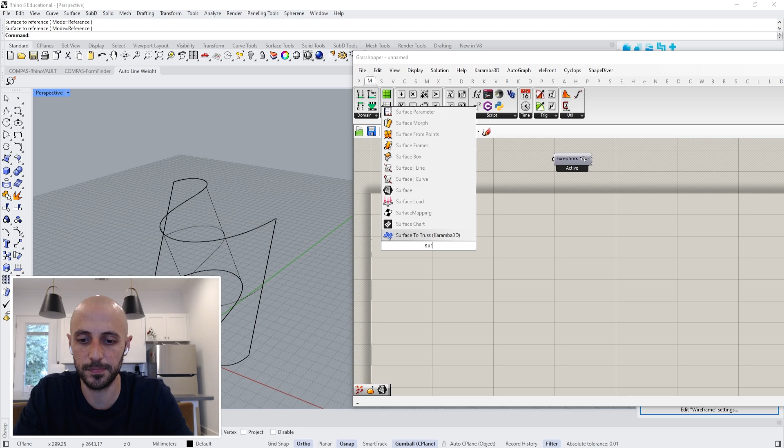Now you can keep your recipe scripts and your files clean and tidy. I've already created this surface here, and let's put this in. So imagine you're working with this surface, but you are doing a couple of different things. So for instance, I contour this surface from this corner to this corner.

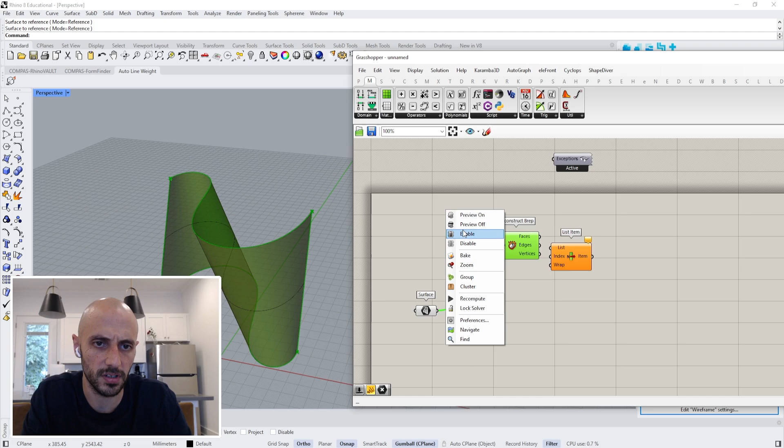Let's start with that. I deconstruct this B-rep, and then I just get the points of it, grab a list item. Maybe I can preview this off for a second. This is my top right corner. This is my maybe 0, 2, 3. I can connect this here. So I get this one here, connect this one here.

So the first thing that I can do is, you see it started to go off. So what I can do, I can create a point, because these are the point outputs. Connect this one here, copy this and paste it, connect this one here, and then I will have the same thing. Okay, since these inputs are the same coming from the vertices, I'll be doing the same thing, but now you see it's all clean and tidy.

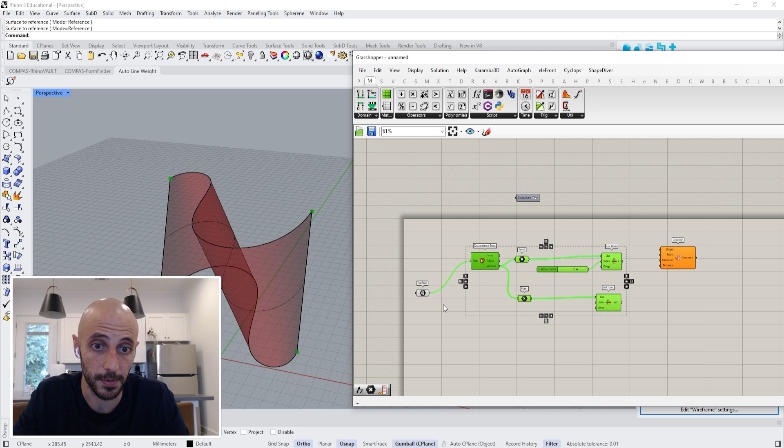So if I want to contour this again, I'll be contouring this shape, right? My surface shape. How will I be doing that? I probably want to do this, right? But when I do this, you see there is a diagonal coming in, which may be a big problem, especially when you're dealing with a lot of stuff coming from the same input.

Therefore, what we'll be doing here, oops, I can delete this one. What we can do here is to create another surface component, connect this one here and this one here. You see, I have the same surface component, but even if I have another surface component, I can contour the surface, connect this one here, copy this and paste, connect this one here, and take this here.

Second thing, it's asking which point I want to start contouring. This point is fine. Direction, it's asking me for a direction. I can create a vector 2 points, starting point and the end point as a direction. Don't need the length of it. And for the distance, what I can do is to have 125. So if I put this, what I started to see, I have these diagonals as my contours.

Okay, so why is this important? Because now we know that our contouring surface is different than my deconstruction. So what I can do, I can select these two, make them a group, right click, blob outline, right click again, color, and change the color to red. Okay, and this is my starting input, so I can also group this one. This time maybe I can keep it as, I don't know, purple and rectangular.

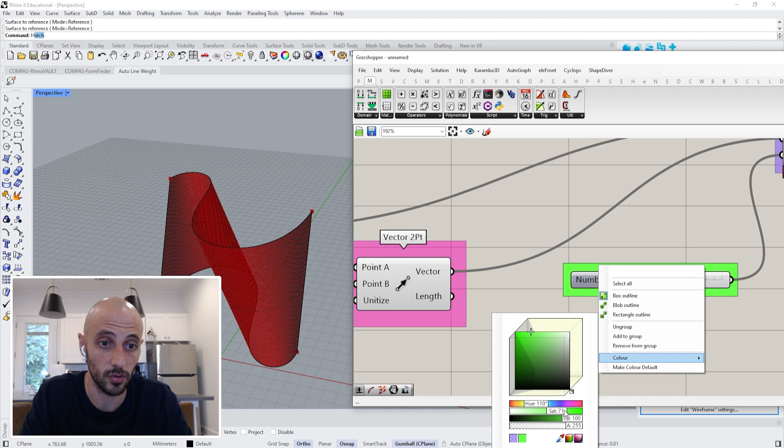But at the same time, I can recolor them based on your color of choice. And on top of these, since we have the names, we can add some remembering points as well. Do we have any other purpose? No, so we can keep it as it is. I also always like to put some colors to the sliders where I immediately see where I have the complete control. Okay, so you see how easy it looks now.

The next thing, let's say, that I want to do here is to find the normal of some small surfaces on top of it. For now, I can preview this all off, all right? And let's say I want to use isotrim, connect this surface, go to domain, divide domain. This is my division domain. I can pull out like 20 and 30 as my inputs, connect this in here as well.

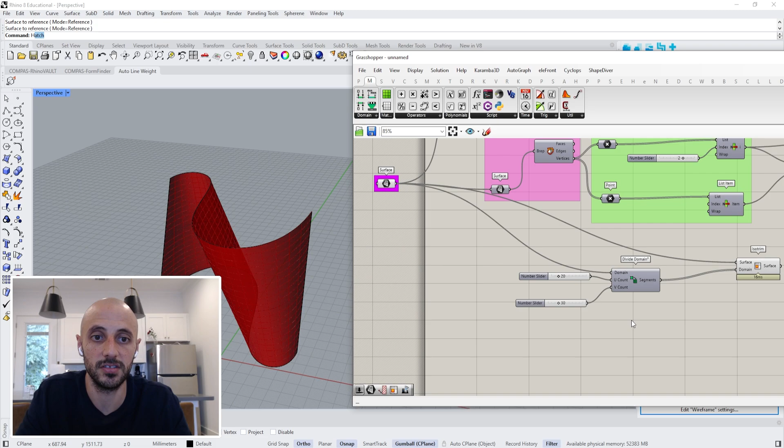But immediately we started to see, like if I take this all here, we started to see some diagonals, and it will create kind of a difficult adjustment, right? To avoid that, immediately I copy this and paste, put this here and connect this to here. And I have some space here, it will be easy and always I can group this immediately.

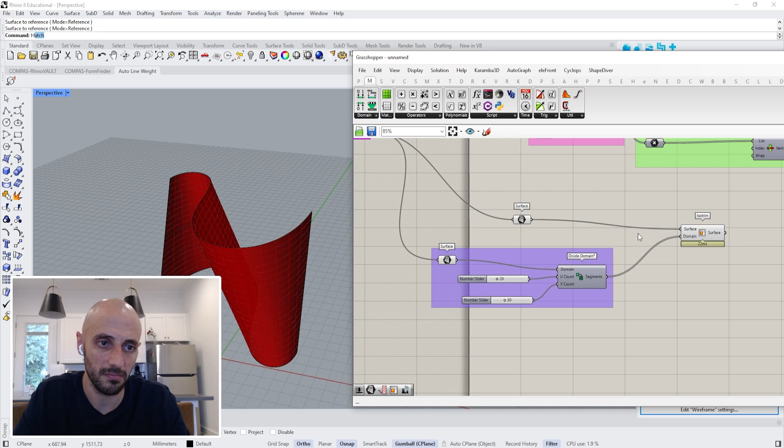Copy this and paste and take this guy here. Now I also can group. Maybe we don't need to group this. We can still keep this as they are.

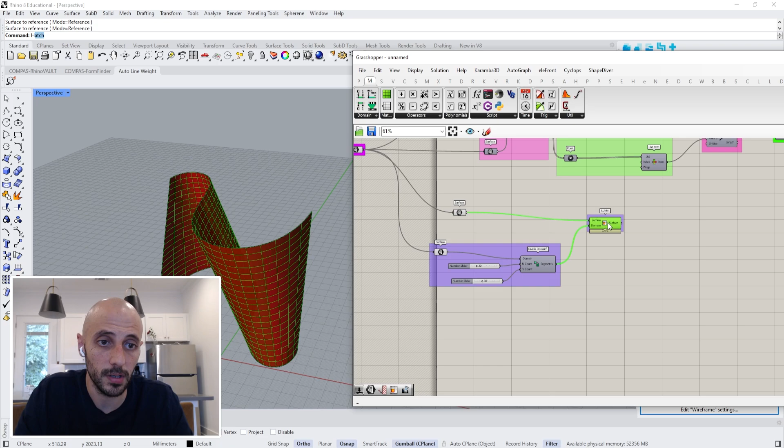And I can maybe take this into a group. So what if I want to have the normals on top of these surfaces? But one thing here, very important. I use this a lot. I kind of try to color things in a different way so that I remember when I go back to them. So this one can be in default.

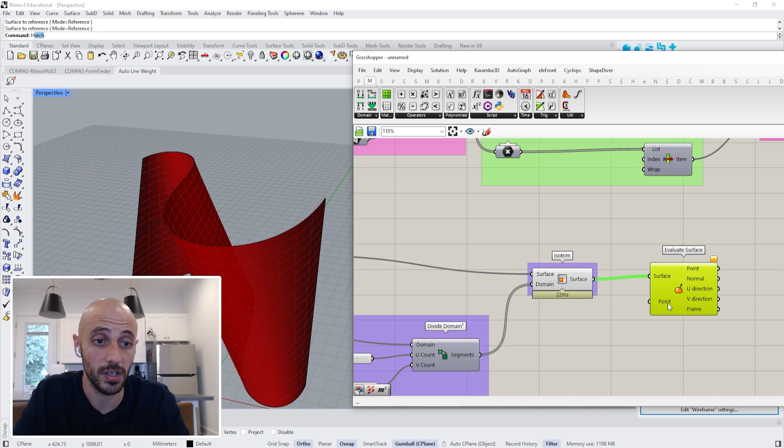What I can do is grab an evaluate surface since I'm planning to get the normals. And for the evaluate surface, I need UV points. As you see, it says UV points. And that will come from surface closest point. These are my surfaces and I'll be putting their midpoints so that I can have it. You see, even in this small cluster, things are a bit difficult to read.

Therefore, I can grab the surface component again, have this one, copy another one, put this in and put this in. What I also can do immediately is to take this here, and do not hesitate to have space in between. Since you got the control now, you have the space. You can use this space to make things easier to read.

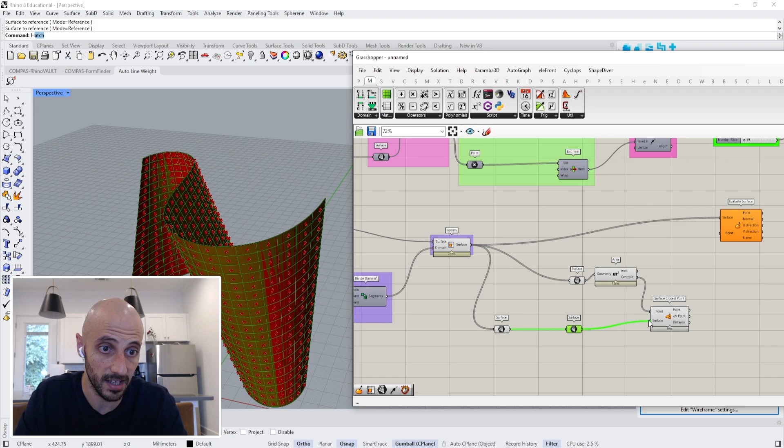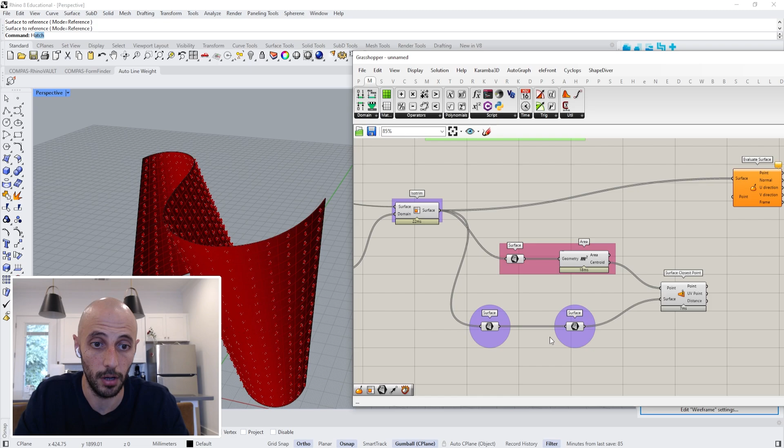And we can keep this here, Control C, Control V, another one so that we will have kind of even better connection. I can also group this. There are some plugins when you group over and over, randomly it assigns new color, but I'm good with this organization for now. I can obviously group these two, right click to them, blob outline, right click to them, and then kind of a bit more. I guess it's too small.

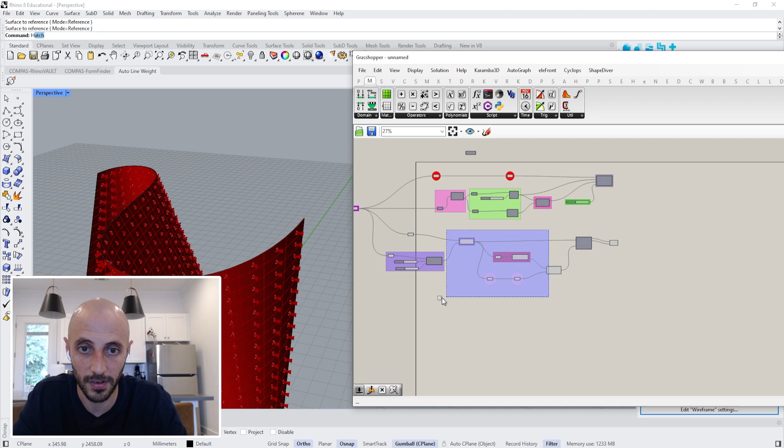So let's get a vector display component here. Connect this here, and I'm seeing the vectors that are showing the outside. Obviously, we can preview this off. We can preview off almost everything, okay? And this will still show me the surface, or I can maybe preview this on and this off. It shows me the cassettes or the surface normals, and this will show me the contours, okay? But these are both different things, right?

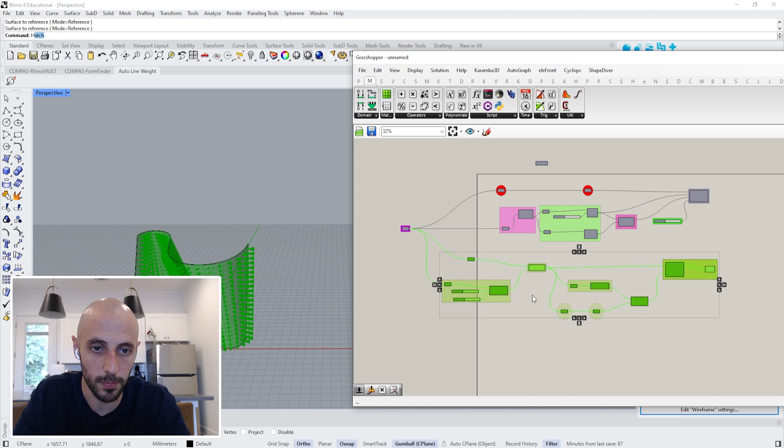So one last thing that I can do is before I group this also. One last thing, I can just make a big group of, sorry, not you guys, big group of these, right click to it and make it, I don't know, white, really white color, and grab a scribble and type surface normals and add to this group. By the way, if you double click to this, you can still edit the size of it.

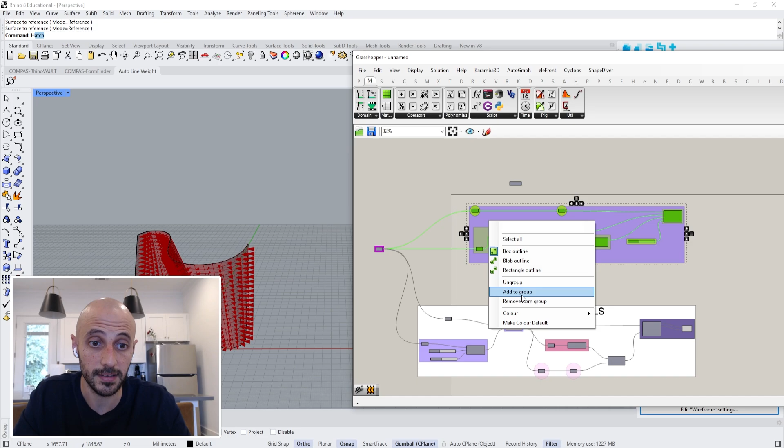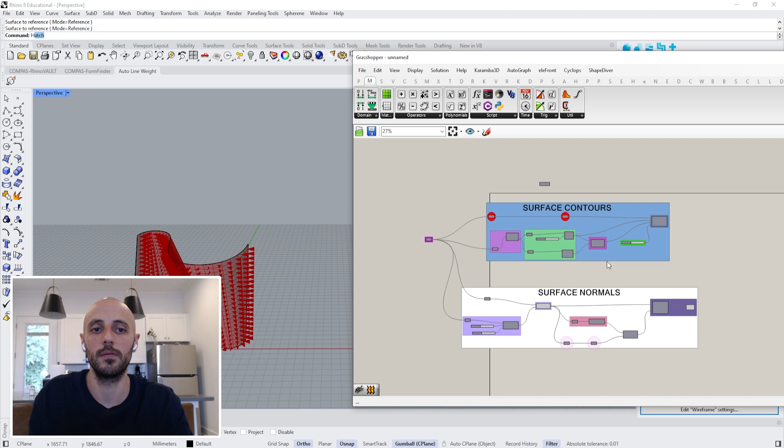And also what I can do, I can group these guys too, right click to them, and maybe black is too black, so let's not do that. I don't know, some whitish or blue color, it's up to you. Copy this and paste, add this to this group and surface contours. So whenever I go back to this script, I know what I did on which part, I know what I did on the other part, and I can easily follow what I did with these surfaces. Everything is kind of going in and out.

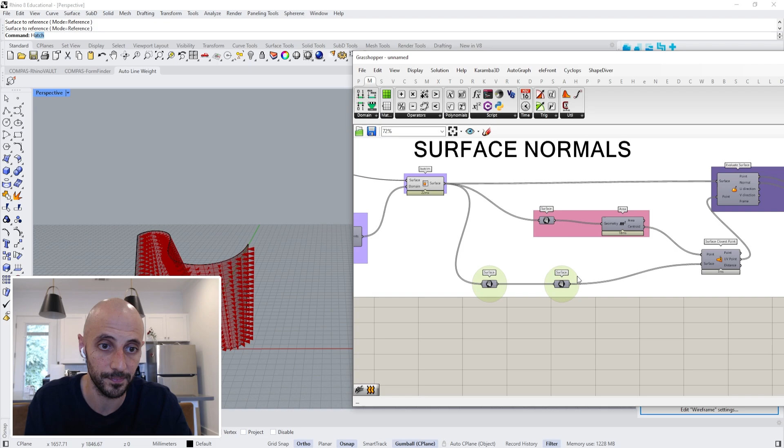The only thing that you may want to add, another surface here for sure, just to give a clear idea. You can connect these two here as well, have this a bit with more space. But yeah, that's pretty much it. I hope you use these methods, tricks to clean up your scripts so that you will remember what you already did when you revisit these ones.